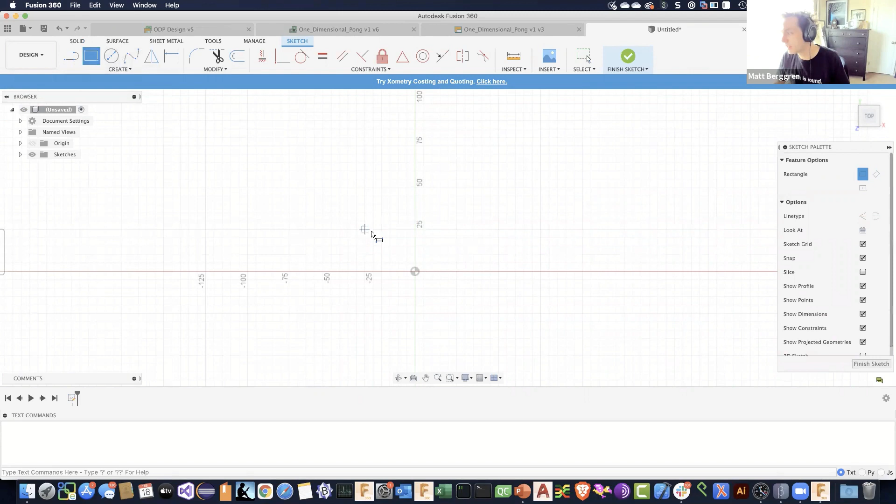But there's also some constructs in mechanical. If you've ever drawn something in a mechanical environment where you decide that you want to use some input on something - like if I create a mechanical sketch and just in drawing a box, as you start to do it, you see what we call the heads-up display, those input fields. So I can type 40, I can bounce over here and say 60.

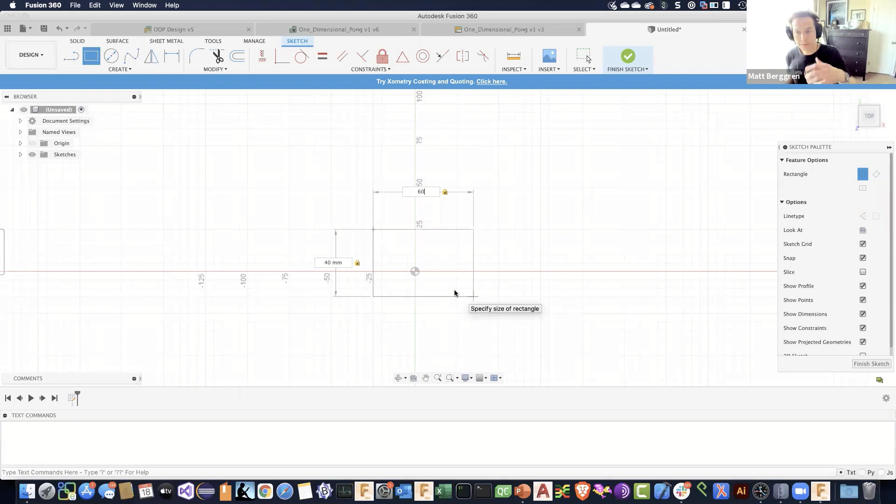I also want to put heavy emphasis on those things because there are so many constructs like that in ECAD that you shouldn't have to go anywhere to do that. It should just be right at where you are. So think about naming a net, or defining a via size - all of those things where you end up in Altium hitting tab and going into the properties panel, or in Eagle typing that into the command line. I think the mechanical tools have actually gotten further ahead of most of the ECAD tools in terms of that kind of direct interaction and direct editing. Those are things we want to balance against the need for a command line, so we don't just race to do only a command line, but think about that direct input as you're doing something.

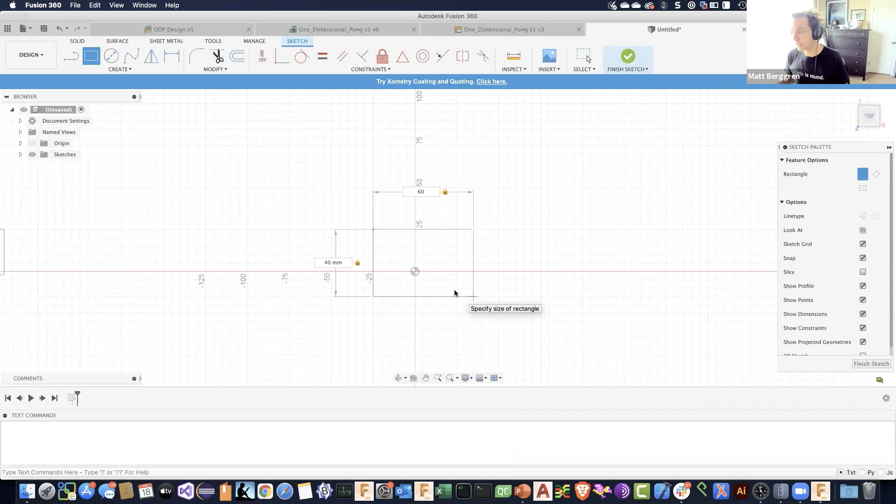And further to that would be to constrain that - to say I actually want to modify something and make it something else, so there's this relationship between those two things, and a modification of one has an effect on something else. I think that's the kind of thing, just imagine that superimposed on top of PCB.

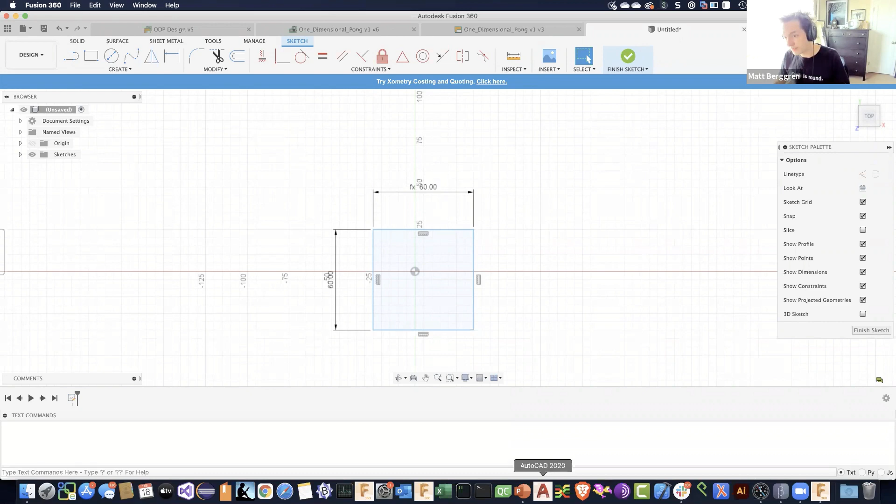Which is probably a good point for me to bring up at least one slide in my presentation, Edwin. Not that we need to jump into the presentation just yet. No, but I actually was going to tell you, maybe we should just show our guys what they're working on. I was going to tell you right now, let's show what you're working on. Let's - yeah, so let me, if we can preface that.

I'll give you the long and the short - I can definitely give you an inside view. Ben and I both asked the guys if we could participate in one of these webinars to really share the point of view and perspective on what it is that we're doing, why we're doing the things we are, why certain features have slowed down in different places, where we're focusing our energy right now, because you might not be seeing features coming out at the same rate into either Eagle or Fusion.

Before we get into that, I just want to emphasize these are things that are in flight. Some of them will materialize, some won't, but your input will absolutely drive the direction. So I don't want you to feel like you're outside of the walled garden as a community of users without influence over the product.

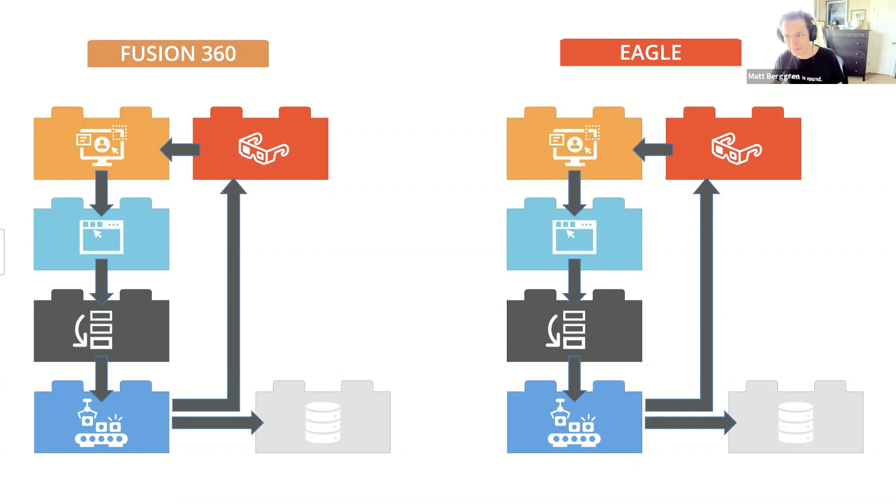So that being said, I want to reflect for a second on what we started with. It's by no means meant as an indictment of classical Eagle, but what we started with felt like there was a lot of opportunity for us to improve workflow, improve basic graphics, and improve the overall experience of the product.

We did a presentation at a Hackaday-sponsored event here in San Francisco. One of my XD at the time, a woman named Tiffany Tsung—absolutely brilliant XD—did a presentation about how when we introduced new icons to Eagle, everybody was like, why did you change the icons? And then she showed the old 16-bit icons from Eagle version 6 that people were complaining about, and the whole community laughed.

But at the same time, there's something really important as a takeaway, which is an icon truly becomes iconic if it's effective—people see it and know what that command does. Their brain gets trained to go seeking that thing in the toolbar, in a menu, wherever it is. Making changes to those things, you've got to be careful that you don't just throw out your best idea, but that you're sensitive to what the community will respond to as the natural progression of something over a period of time. So this is what we started with.

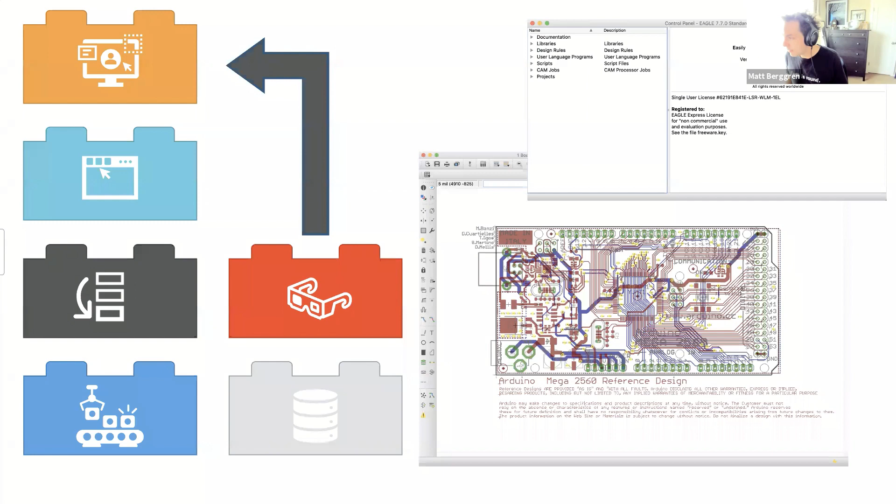When we began the process of integrating Eagle into Fusion and really extracting that core of Eagle, which was the command processing, the command queue, some of the low-level code responsible for the state machine within Eagle—though we've certainly overhauled that significantly since—and then the data model as well.

When we sought to take that technology and move it into Fusion, this was also one of the prerequisites for me, coming on board at Autodesk and really understanding whether Eagle was going to be the one. We needed to know that we could separate the various layers of the application. You'll often hear software engineers talk about tight coupling versus loosely coupled. What we were really looking for was the right level of separation of the various layers, so that when we brought these things into something else, we'd be able to reuse a good deal of the code.

It shouldn't matter what the context is—it could be in a web browser running on a server somewhere, it could be on the desktop, it could be on a mobile device. It shouldn't really matter. If the separation is right, we can deploy various things below various lines and build an application around that with a different UI, a different command pipeline. So to the question about the CLI, there might be a version at some point in the far-flung future that has no CLI, because maybe that's not appropriate for some context, like on your phone.

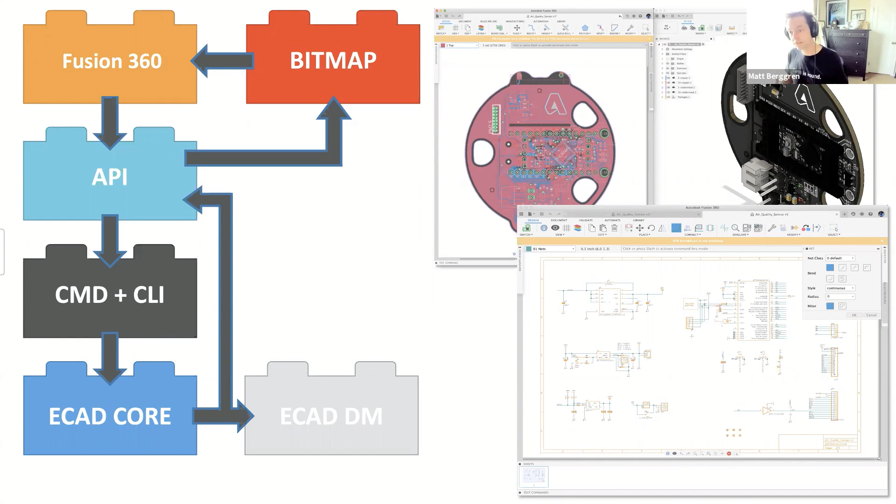So I want to introduce you guys to a concept, and this term has never been used outside of the company. It's a little bit probably controversial that I'm using it.

So we got the core of the ECAD capability cleanly separated from its UI, from a lot of the command processing and command queuing and all of those various things. And there were some things that we realized very quickly.

This was from feedback from the community, but also from the fact that—if you've opened up Eagle's splash page and seen the tube amplifier on it, that was my tube amplifier. I designed it, and I designed it because I used the product. This was always one of those things that I think makes Ben such a special person, George and Edwin such special people—we actually use the product and we build stuff.

So I was working on this tube amplifier and decided I was going to do it all in Fusion end to end. And I felt the performance challenges that the community was complaining about, switching between documents. There were things like how long it took to place a part. It was great to get the library cache, but once the library was cached, everything was snappy—it was that first retrieval that was super slow.

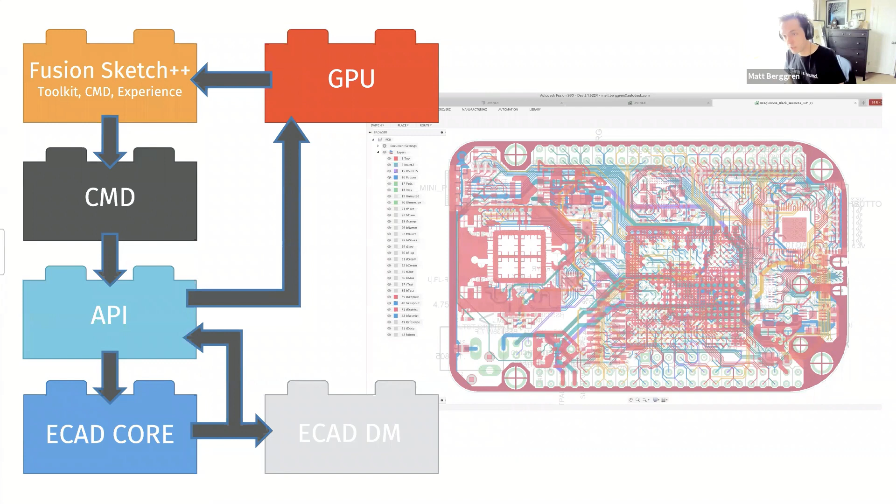Our team has looked at using Sketch, going native with Sketch, and that's an intended future. I think we can confidently say, without any promise of timeline, that's what we're working on. As far as the other structural work: good API isolation, building out our test suite to test every layer of the application, so if something is broken we can catch it with automations—following something much more consistent with how the web is tested and applications built on the web.

Moving the graphics system to using GPUs, to using shaders—that one was just obvious. We had to do that to get the performance we wanted. And then developing a level of consistency with UI and UX to give you one UI toolkit that presents everything in a consistent, uniform way, but didn't take anything away from the electronics user. The last thing underpinning everything we're doing is we needed to hit the performance envelope we felt confident with. When you switch between documents, it should be instantaneous. When you drag off a tab and open up multi-monitor, it should be fast.

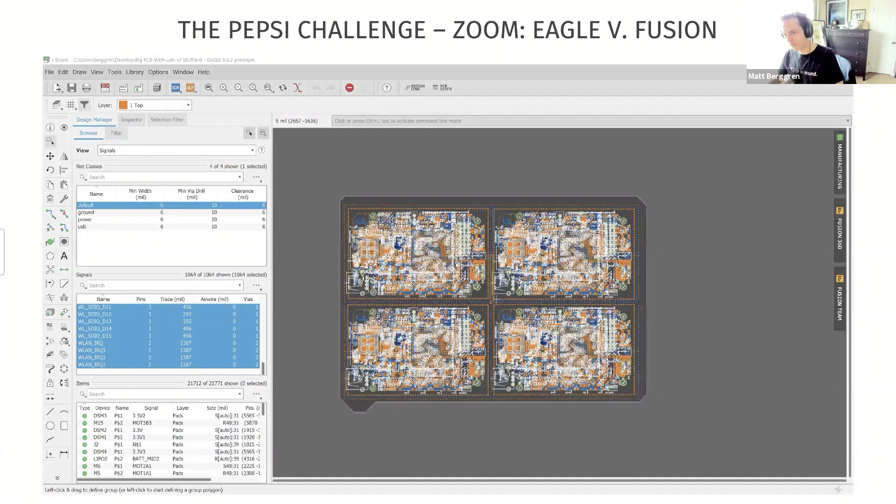So here's kind of the punchline. We got to a place and I said, well, will it work? So in this video, you'll see Eagle's zoom performance, and I apologize to people in Ireland and Munich and things like that. If you see excessive frame drop, just assume that Eagle is slower.

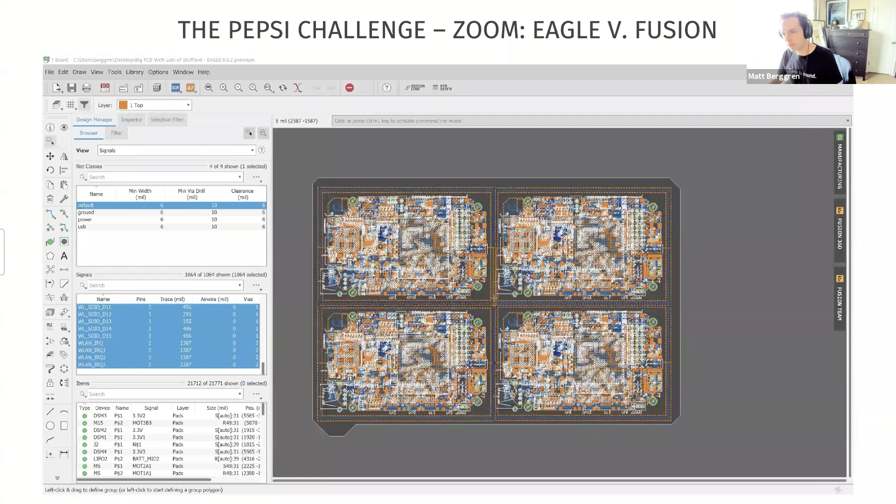But this is zoom performance on a 4-up BeagleBone. And this is not that sophisticated. I mean, it's a fairly sophisticated board by classical Eagle standards, but it's not that sophisticated. And this is the same zoom behavior in the sketch environment that we've built out now in Fusion. And what we found is we could hit very easily 30 frames a second, 40 frames a second, which is kind of a simplified shorthand way to describe performance.

It's not always going to be that way, but we could hit 30 to 40 frames per second, no problem, with a 4-up BeagleBone design, zooming and panning and other things. Eagle was drawing a bitmap. Every frame was updating a bitmap, and you don't do selective pixel editing on a bitmap. So in this case, we can draw the things that are on the screen and ignore the things that aren't, because we can do a lot of this optimization on the GPU side. We can also use shaders to draw all of these things and have better transparency, better highlighting, and all this other stuff.

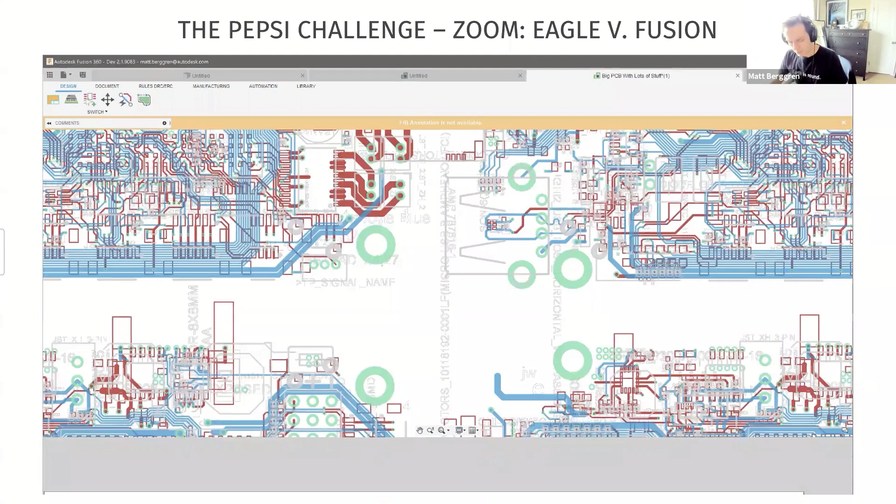This was actually one of the tests of whether it's going to be fast enough if you consider hatching and other things. My first test was with long strings of opening scroll text from Star Wars, but I decided I was just going to load this thing up with text and see how text is going to render, how fast it's going to be. Can I still zoom? Can I still pan? Can I still highlight? This has a lot of stuff in it.

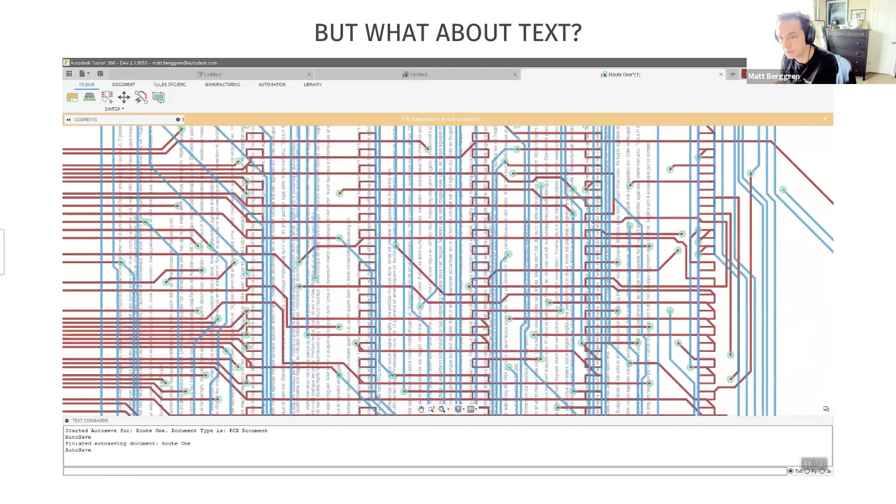And still, by every conventional measure, it's what you should expect an ECAD tool to be able to do. Coming from Autodesk, I did a bit of a thought experiment - took as much text as I could find in one blob, pasted it into AutoCAD, and said, can AutoCAD do this? Sure enough, AutoCAD can do it. AutoCAD can hang on to the blueprint for a 100-story building. So what are they doing for 2D that the rest of the world hasn't caught on to?

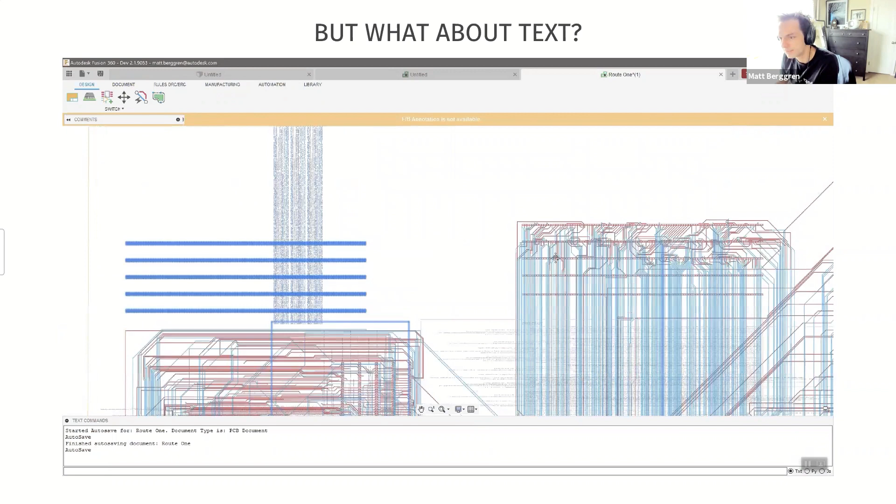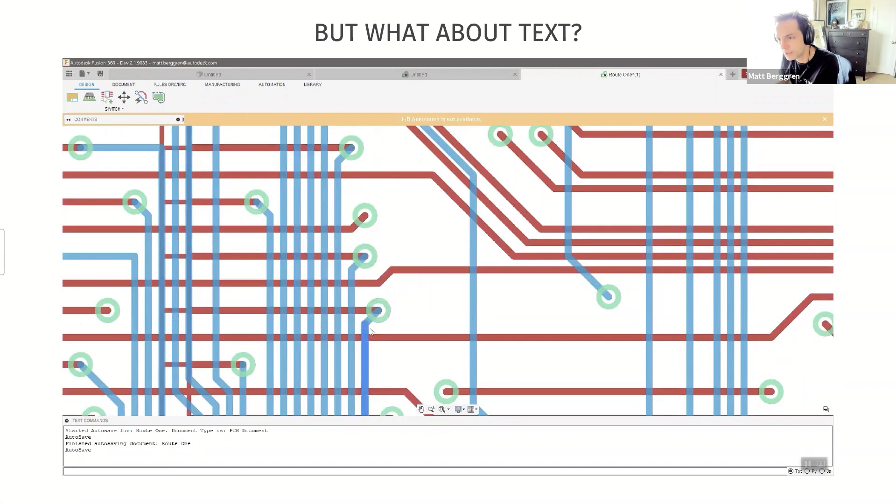And so as we started to explore that, we got to know the AutoCAD team pretty well. It was really this type of thing we were looking for - how do we hit test something so that just dragging your mouse over it, it's highlighted? Those sorts of concepts might seem like every tool should be able to do that. But when you talk about the numbers of objects, and the fact that not every pixel is actually being drawn on the screen, so you may not have something visual to hit test against on the GPU, the optimization of that is non-trivial. So we really wanted to push the envelope. I don't want to have to answer the performance question 5 years from now. I want to answer the 5-year-from-now question today.

So this is part and parcel of what we had looked at. It's only one example - I don't want to say this is the only example. We looked at everything else too. We looked at the UI and said, okay, how do we improve the overall experience? How do we build out an experience which doesn't just feel like every other CAD tool that's out there? Because I think Fusion is pretty unique in that it really tried to scope down much of the interface so that you don't feel like you're surrounded by millions of buttons and menus and things where you've got 3 layers of menu.

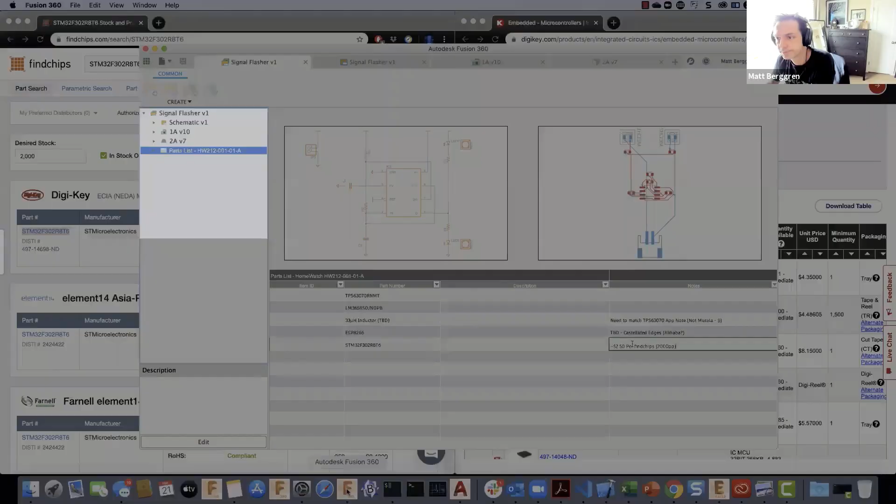One of the things we want to focus on is bill of materials and attribute handling. So one thing I'm working on scoping right now is a parts list. The idea is that somewhere you want to record what part you want to use, and at some level you want to link that part as a virtual thing, a thing you found on the web, to an actual part in the library. You should be able to have all of your actions hanging off of that.

Whether that's I want to use a 555 timer, or an STM32, or an NRF chip, or whatever it is, I want to add it to a parts list because I know I'm going to use that part. I want to link it to the source, and then subsequently, depending on the number of those I add to a design, I want that same parts list to increment the quantity, because I am steadily approaching a bill of materials. That's one of the things we're also looking at right now.

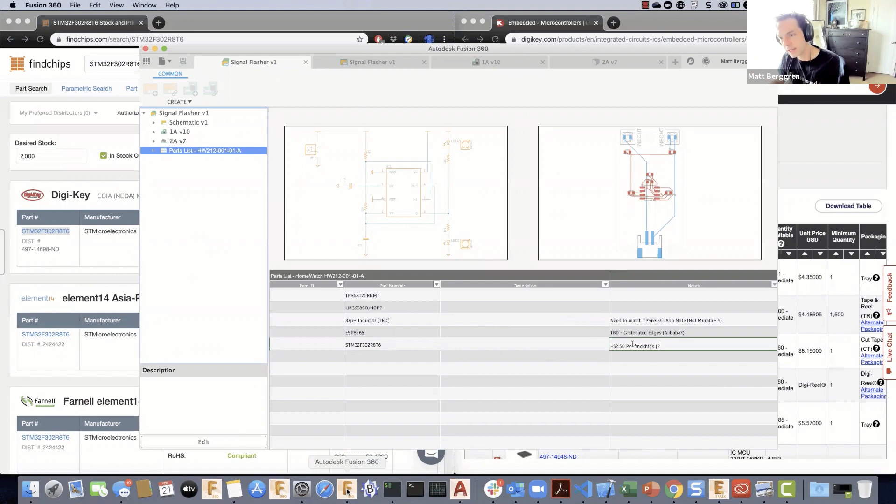So it covers the whole range, from attribute handling to bill of materials to output generation. I just want folks to get a feel for the fact that this is one of those things we're very actively working on, so we are going to address it.

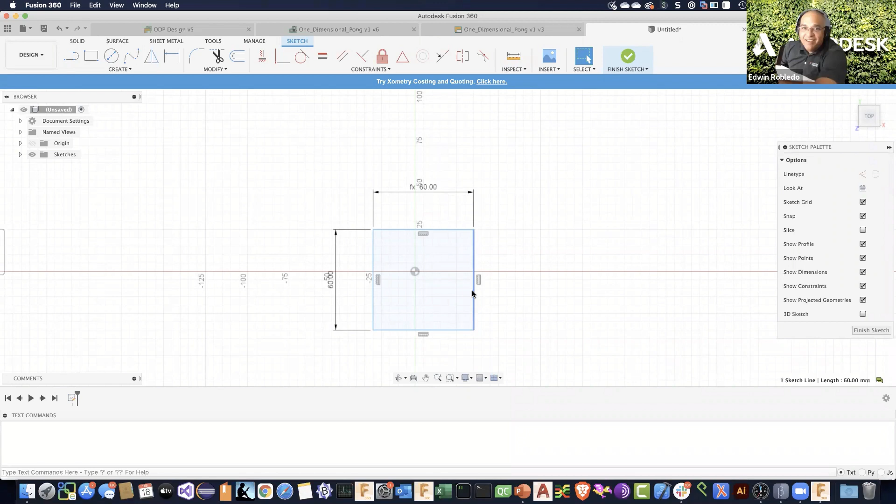The question was basically whether there are other plans to support going to PCB assemblies with more intelligent formats.

ODB++, IPC 2581, things like that is his question. I would say we're not in development on anything like that now, but it's certainly within the scope of future considerations. So we spent a lot of time talking about this performance issue. Once we've gotten the lion's share of that done, we'll be filling our development pipeline with some of these other things.

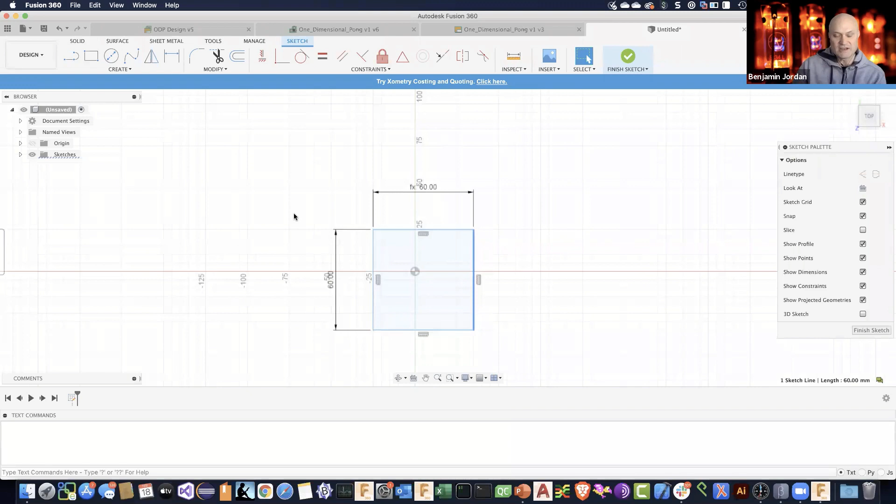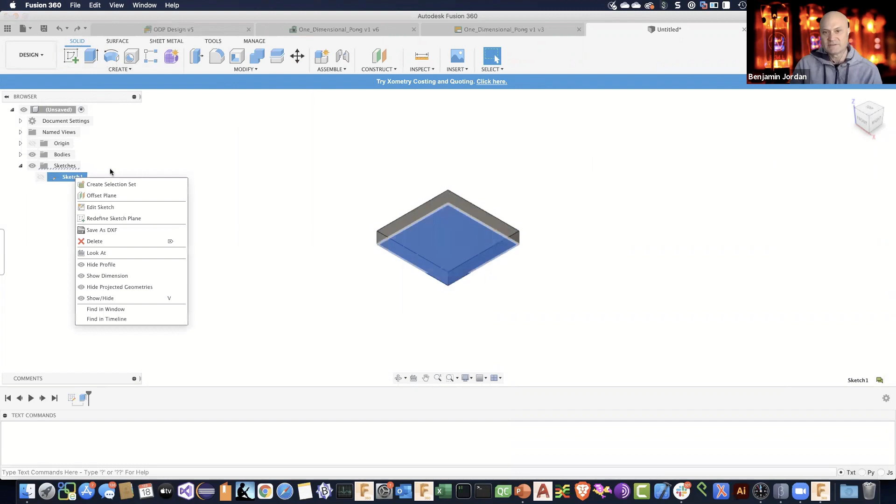One of the things that's exciting about Fusion in general is that it's not just a modeling tool, it is a manufacturing tool. So on the mechanical side, you have CAM, you have drawing, a really powerful set of drawing tools. And this is the other reason we wanted to combine that with electronics, because we can use some of those powerful technologies to get things like nesting for panelization, just as an example. So part of that will be down the road, reviewing all the different areas of CAM and seeing where for electronics CAM we can make those improvements. And I think it goes beyond just sending data out, it's also about getting good data in as well.

We have like four questions asking about the future of Linux support, so I'm going to ask it because we can kill like five questions that way. What's the plan, or is there a plan, for Fusion 360 to support Linux, and any variation of that question you can think of?

So I'll tackle that one head on, because for the longest time I ran a build and release team that looks at platforms that we build on. There's some investigation that we started into that. I don't want to set false expectations, but there is an appetite to explore it. If you think about the nature of an engineering process in an organization, the exploratory phase is a really important one, and it's got to be a funded exercise. I can say that the exploration of that is something that we're looking at.

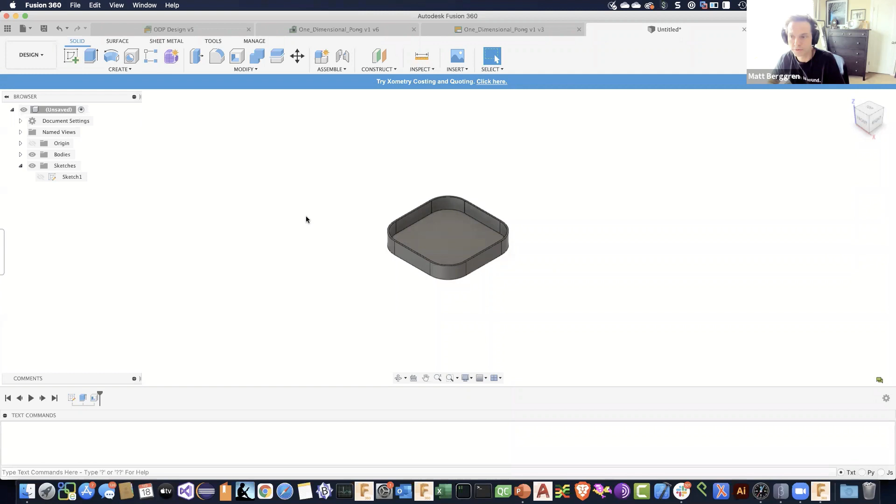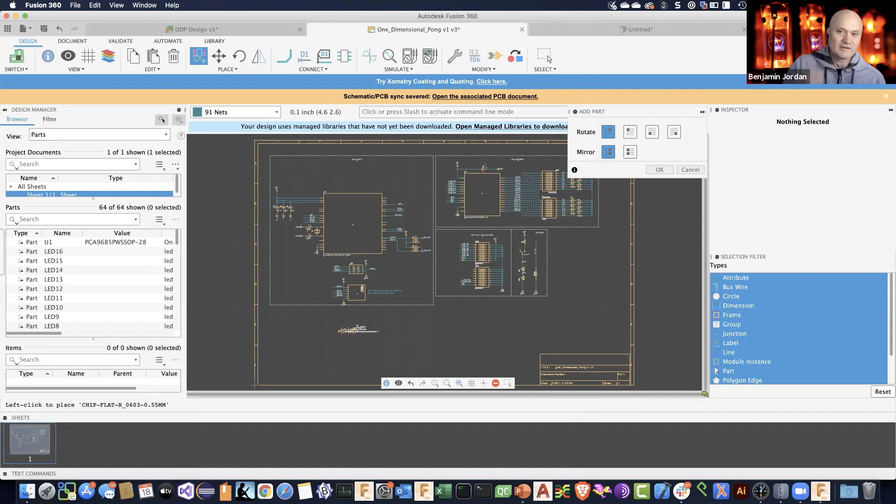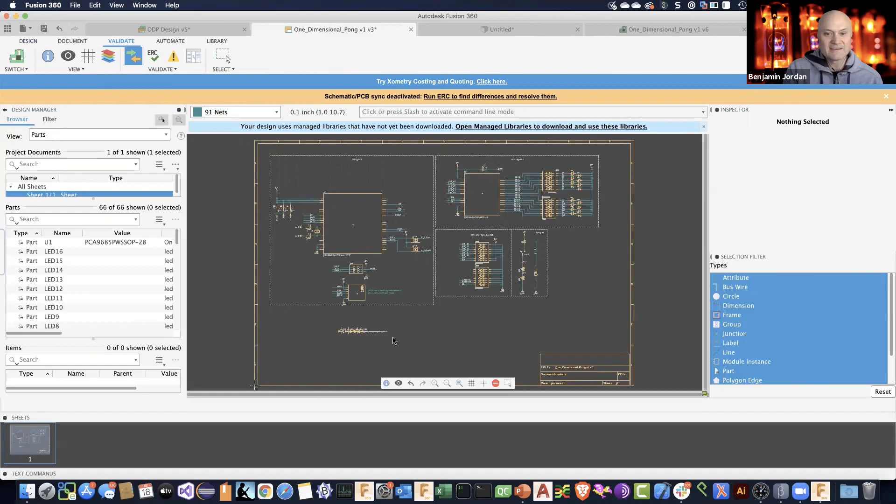The underpinning theme really to Fusion is making the design and production of consumer products really easy, and that's kind of our North Star for what we want to do. There's a lot going in right now besides performance, onto general usability. We're doing a lot with, and I recognize some of the names on the webinar today as people we've even interviewed to get customer feedback. I really just want to reiterate that all your feedback is very valuable and helps us. There's two sides of it: one is we could make a faster horse, or we could make a motor vehicle, but I think pretty much everyone's in the motor vehicle market nowadays.

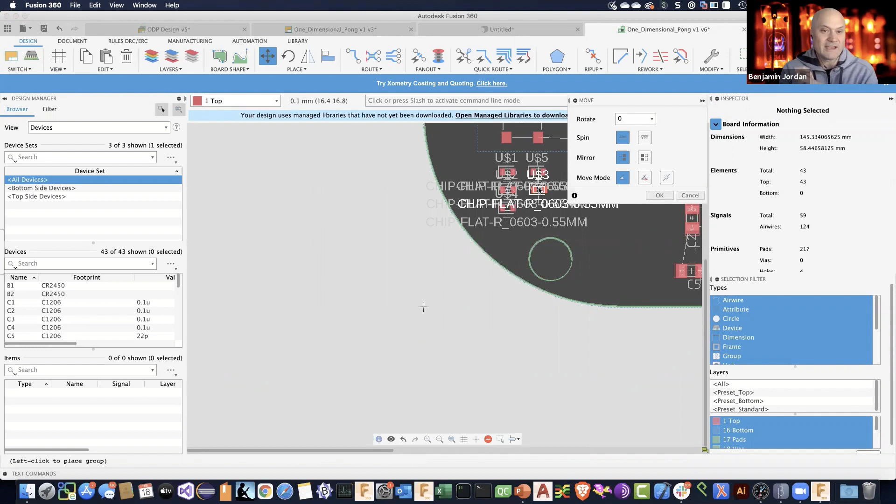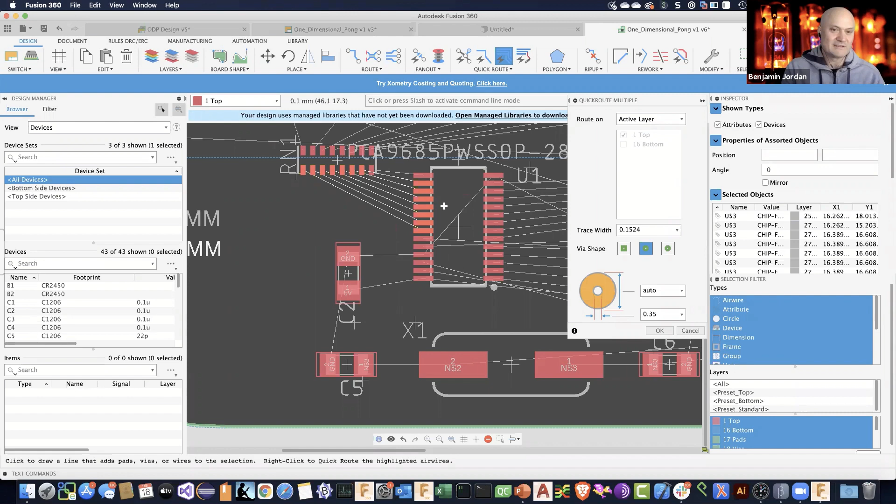There's a lot going into libraries, a lot going into general usability and workflow optimization. He's not on the call with us today, but we actually have a dedicated XD guy who's really good at helping us clarify our thinking around the look and feel of the product, and some of the workflow steps where there's just too many clicks or things get bogged down. So we're streamlining as much as we can. There's a lot coming. It takes a while to get there, but that's why we're doing this webinar today, to make sure people understand we're really investing in this.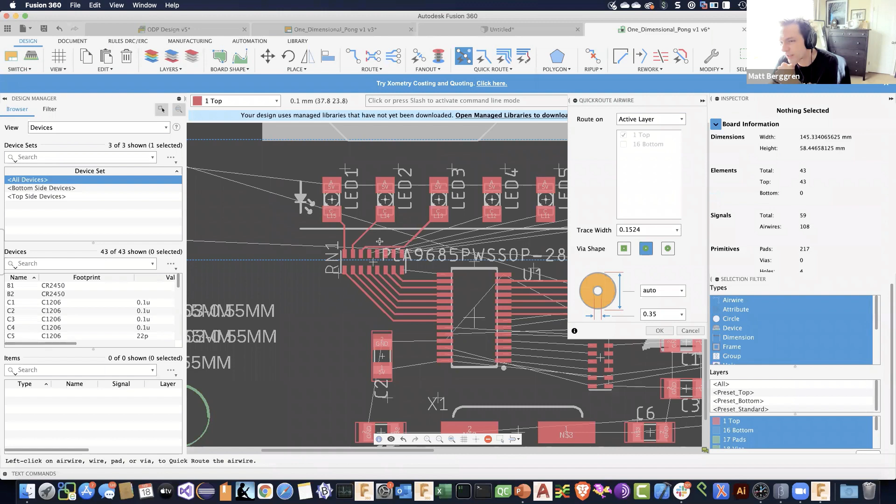Well, I'll just sum it up by saying I'm super interested in feedback from the community. Don't think that we are ignoring the feedback, we're pretty actively trying to be as responsive as we can. Some problems are just long lead time problems. Improving libraries was one that we had to do for a long time, and it's something we're working on. I really hope that I managed to give you guys confidence in the fact that we're thinking about many of the same things you're thinking about.

You guys probably, if the savvy ones picked up that I just synchronized a schematic and a PCB that were out of sync with each other because I added some components to schematic, but you can watch the video later for those who didn't catch it. All of those sorts of problems we are actively looking at and trying to maintain a sane, sensible approach to tackling them one after another in a very deliberate way. We're going to continue to work hard. We are not going to cease to invest in what we acquired or this community.